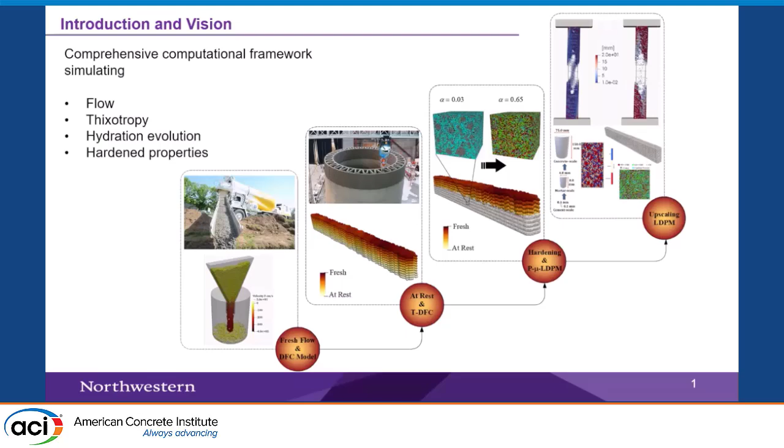We haven't completed all of it, but we've made progress. For the fresh state, for flow, we used the so-called discrete fresh concrete model. I built my entire career on repudiating continuum mechanics and doing all models discrete. For fresh concrete we also do discrete simulations. This model falls into the category of discrete element method or distinct element method approaches. In this case, the yellow thing is one aggregate, and the external shell is cement paste—we call it this hard core, soft shell type of approach.

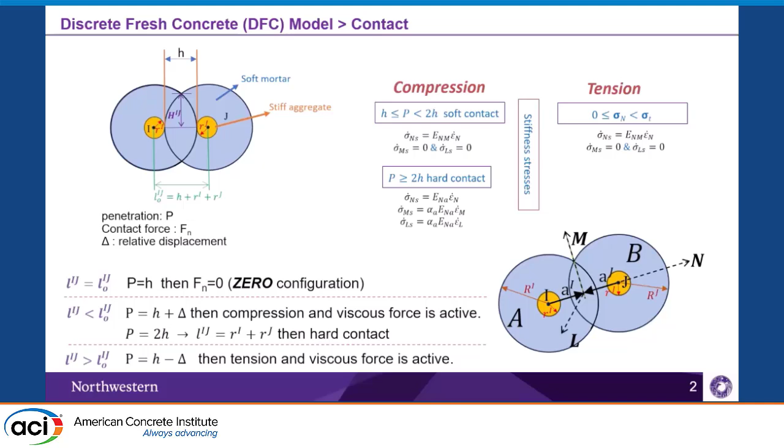I won't go through the equations, other than mentioning that we try to formulate the model in terms of classical measures of strains and stresses, so that it's compatible with another model I'll show later—the lattice discrete particle model, which we use for hardened behavior. We want a formulation at the fresh state that's mathematically consistent throughout the entire life, evolving naturally from fresh to hardened state, rather than saying fresh state is a fluid and hardened state is a solid.

When there is this change from fluid and solid, that's a fundamental scientific question, because the fluid behavior is quite different from the solid behavior.

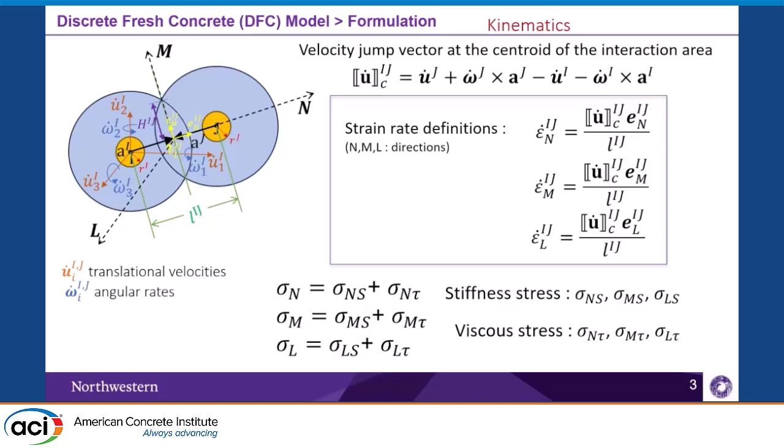Okay, these are usual stuff. I think I'm going to skip. These are basically equilibrium equations, etc.

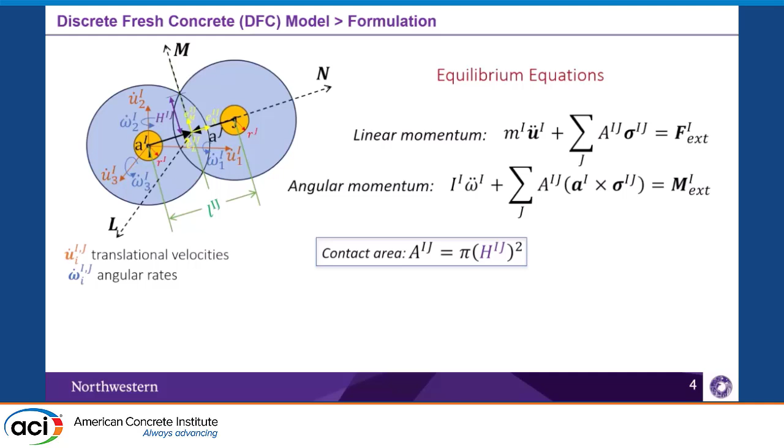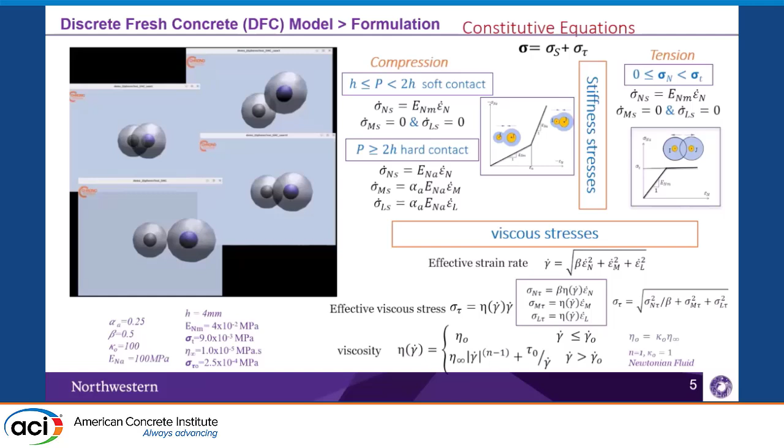The one thing I want to mention on this slide is the effect of rheology, which we define at the contact between particles. We can define a normal and shear component, an effective strain rate, and then an effective stress, and the viscosity is whatever that equation is.

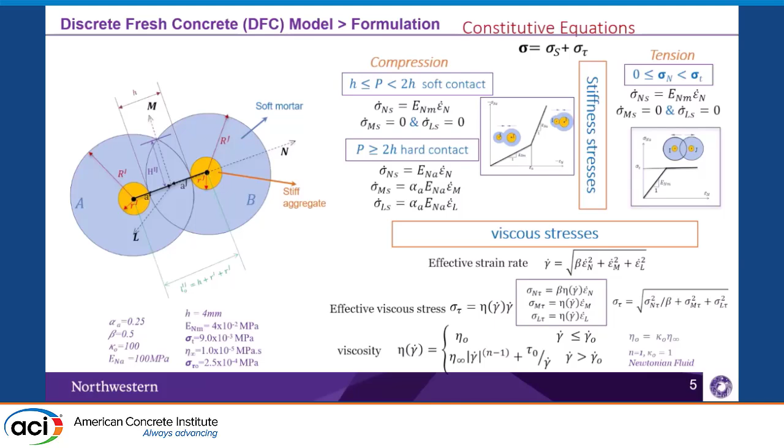We can use Bingham. Actually, we typically use Bingham. Of course, you can use any nonlinear equation if you want to. That's not a problem.

Okay, skipping this, these are just nice videos. Now maybe go back to here. So this is some of the input information that we use for the model.

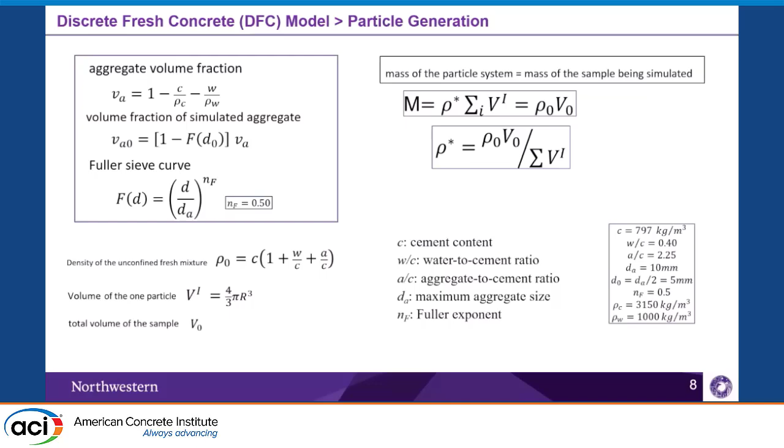The one thing I want to mention is that the mix design—cement content, water to cement, aggregate to cement, maximum aggregate size, etc.—are all part of the formulation, because we try to recreate that specific internal structure. That is the whole point of this type of technique.

This was implemented in Python scripts in FreeCAD. It's all open source, so whoever wants to get their hands on this stuff can.

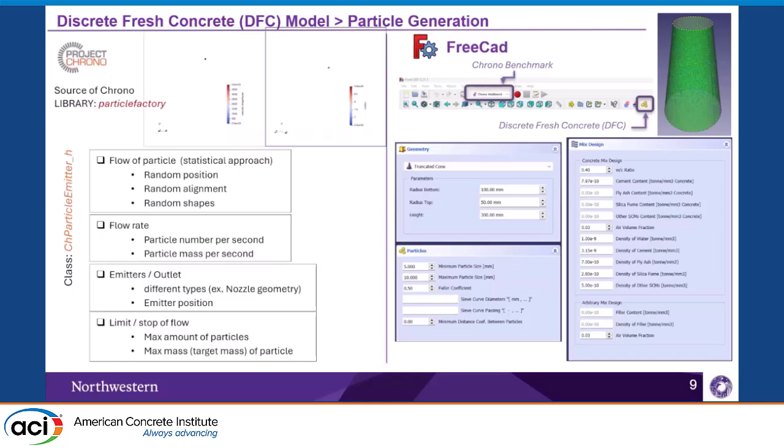We are also using as a solver Project Chrono, which has built-in methods for generating particles, controlling flow rate, shape of the outlet, and these type of things. There is a GUI where you can put all the parameters and get the geometry.

Now, one comment about the parameters that govern the model. First of all, we have this so-called mortar layer, the definition of this soft shell around the hard aggregate. And then you have some elastic property of the interface in the normal direction.

When it is completely fluid, we make the assumption that the material does not have shear stiffness. It's questionable, but that's exactly the evolution from fluid to solid, right?

And then, of course, you have the viscous parameters, which are the yielding stress and the viscosity. Now, the mortar layer and that initial normal stiffness are what govern compressibility of the fluid. Hence my question to Librad earlier.

You do have some compressibility in the fluid, and that's important, actually. It's important in terms of how you capture the shape of the printed material.

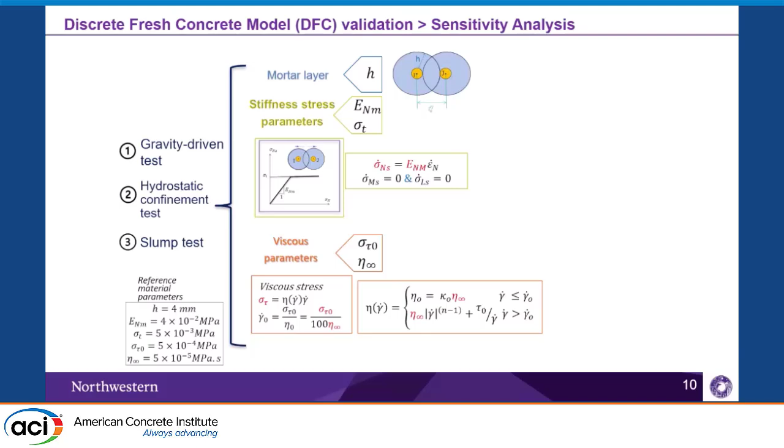Okay, now this is just a very simple simulation of a slump test, using the Project Chrono that we use. It's an implicit code, so you need to check time convergence, of course, and be careful.

These are 4 simulations of the same thing for different time steps. At the beginning, the simulation seems okay, non-symmetric but okay. But in reality, that's just because you are far from the time convergence of your algorithm, so you need to be really careful.

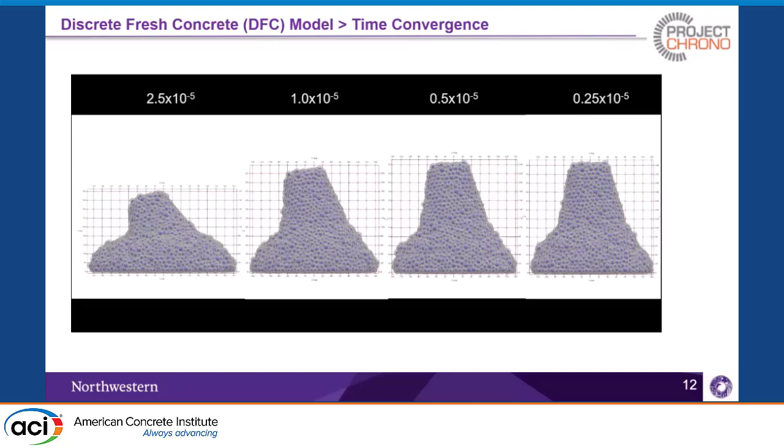I know many people do, including myself, explicit calculation. In that case, you don't have the problem of time convergence, but you have the problem of computational cost.

We did simulations of—I don't know if this runs. Oh, it does—this L-box test. You can change the parameters and simulate self-compacting concrete, ordinary concrete, or 3D printable, as you'll see in a second.

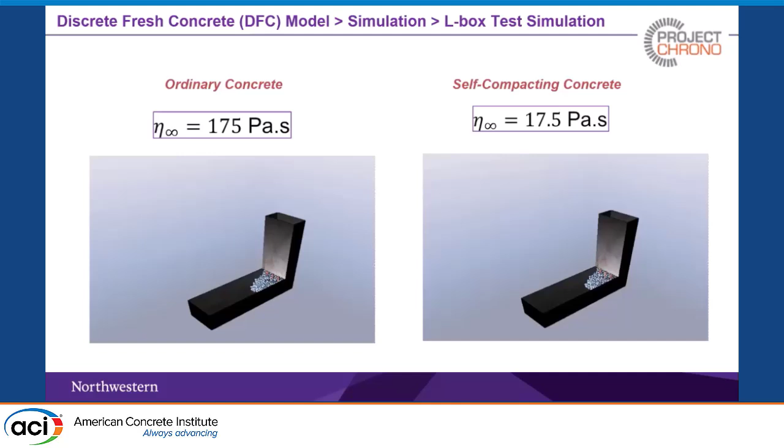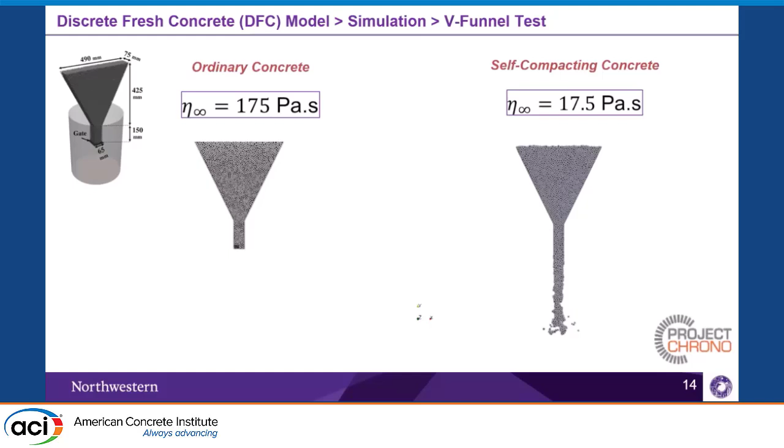Another simulation is shown here. Again, let's see if it runs. It does. Again, different behavior for different parameters that you can select in the model.

And these are simulations of a building material cell, or BMC test. It's a rheological test that we are using in the lab to characterize ultra-high performance concrete. That's the test, and here is the simulations we can perform.

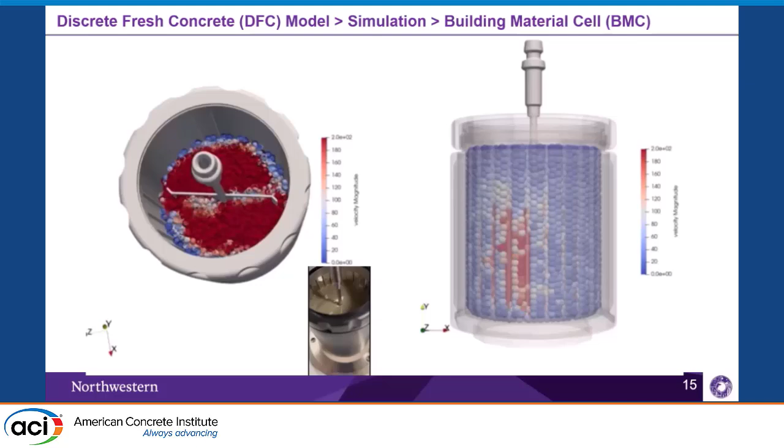And then, of course, we can compare the response in terms of torque versus rotation with experimental data.

Now, one important aspect—this is fresh concrete—is this thixotropy. Let me push everything up. So what is thixotropy?

Well, if you do a rheological test and apply pre-shearing, you get a certain response. If instead you wait and take the material at rest for a certain time and do the same rheological test, you get a different response. There is a flocculation and structuration phenomena that occur in the material, which makes the resting period an important variable in the behavior.

And that is very important for 3D printing. You know, in 3D printing there are typically two possible alternatives to make a certain process buildable.

One is that we put hydration accelerators, so that it hardens quickly. But then in that case, we have a problem at the interface—very quickly we get cold joints.

On the other hand, if you have a very long open time, then you don't have the hydration because at the beginning it doesn't start. And then you want to have the thixotropy to help, so that the material is there and has this additional strength that develops.

The typical model we found in the literature, including for SCC, is like the one in the middle, where lambda is an internal variable representing the degree of flocculation. You have your Bingham model that is a function of that lambda. Most of the time in the literature, they assume the yielding strength is a function of lambda, not the viscosity, and they typically use a linear dependence there. The equation at the bottom is the evolution equation for the degree of flocculation.

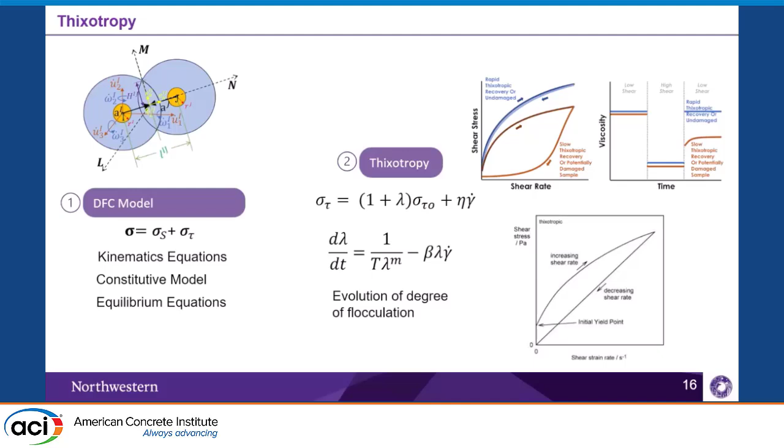Our experiments show that's not how it works, at least for our 3D printable mix. On the left-hand side are stress versus time plots for different shear rates. The shear history is up there: 10 hertz and 3 hertz for 200 seconds.

If you use m equal to 0, you cannot fit them. You can fit one, but you don't fit the other. Our fitting of that data shows that m is 1. Is it 1 for everybody? No, that's just for that concrete. But the bottom line is that the positive term of that evolution law is not constant, it's dependent on the degree of flocculation.

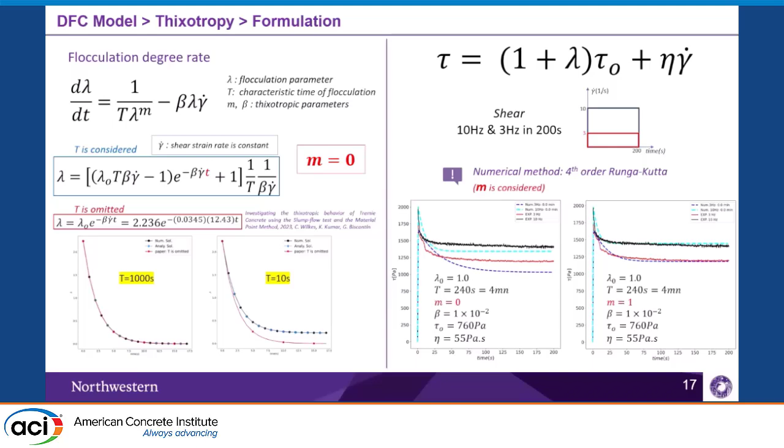Please tell me when I have to stop, okay? Two minutes. Okay, alright, then I'll go here.

The other thing is that we really want to simulate this transition, okay? There are many different things we need to do. First of all, we now have a model for the fresh state. We have a model for the solid state, which we've used for the last 25 years. And now we have to make the transition.

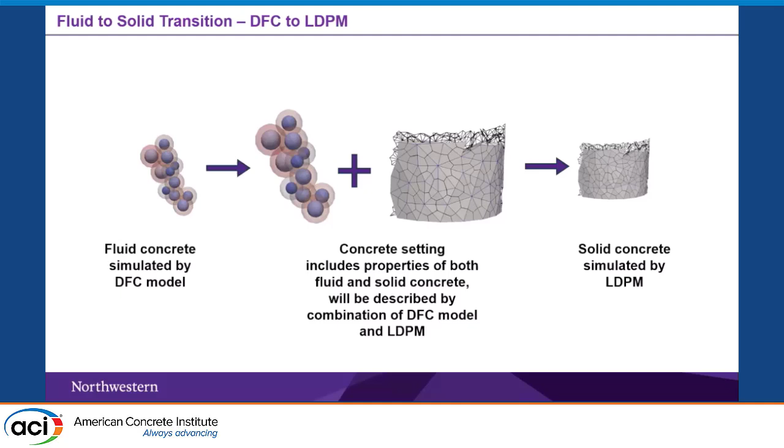Mathematically, the models are formulated so that mathematically you can transition, right? Now, computation is a different story, and also physical is a different story in terms of what that means. What does setting mean? I've been asking questions even now in our committee. So what is setting? What is setting? Anyway, from the computational approach we are taking, we try to do this transition in this way.

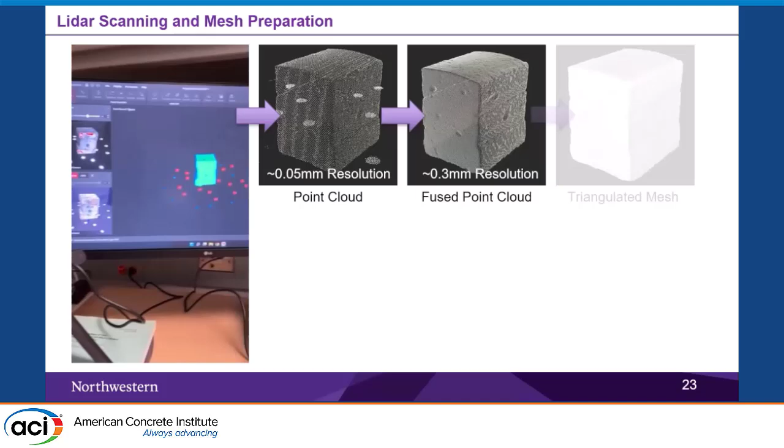The other thing we are doing is scanning those samples so that we can recreate them in our computers and then test them. And that, again, is for the hardened portion.

As Shady mentioned, one of the works we are doing is: if I calibrate a model on my material on a cast specimen, can I use those parameters for the printed material, meaning the difference is just geometry, or is there some intrinsic difference in materials? We are trying to check that with these experiments, because now we have experiments for the same material cast in place and 3D printed, and we have the model that we can calibrate in one setting and use it in the other to see if we can capture the response, and that is what we are doing.

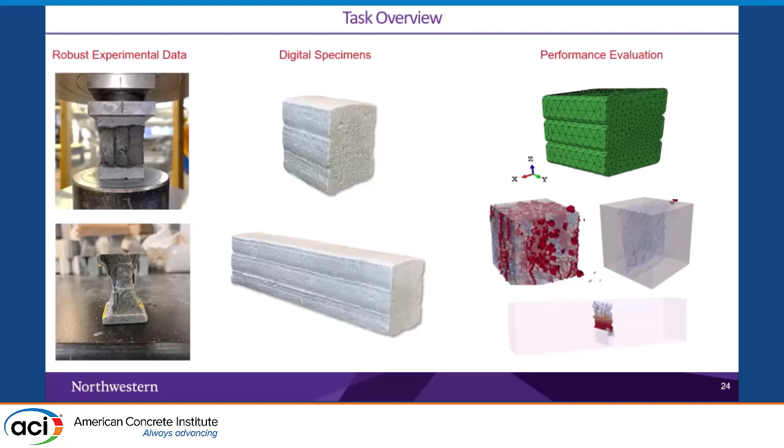But again, the message I have is we really need to invest much, much more on computational modeling of concrete. This might be a self-serving comment, but I think it's really what I believe. And all the 3D printing companies that might be here, I think you guys should invest more in computation, because it's not sustainable to keep printing and breaking, printing and breaking, printing and breaking. Thank you very much.